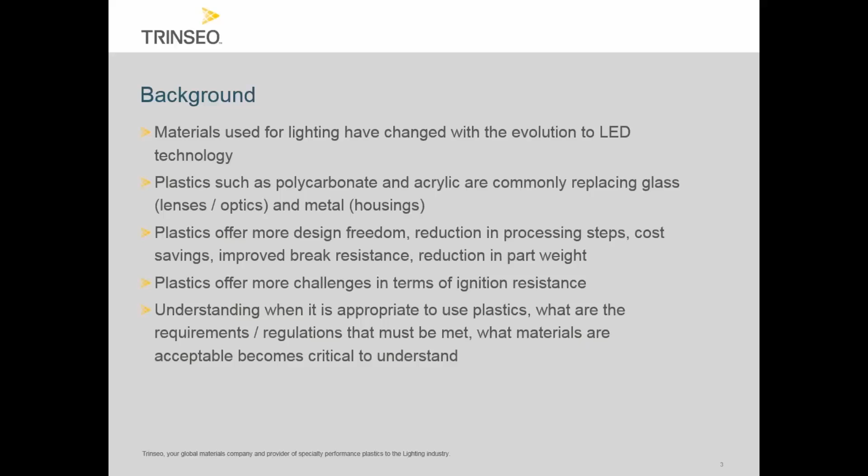And to help us understand the regulatory requirements for LED lighting applications and the process for achieving regulatory compliance, I'll now turn it over to John Allen, who's the president and founder of Product Safety Consulting. John, it's all yours. Thanks a lot, Bill, and welcome everybody to the webinar. I'm John Allen, as Paula and Bill indicated.

Been doing compliance for the better part of 31 years now. Lighting has always been part of our work. So we've seen the LEDs come, and all the new requirements, UL 8750 and 1598. So we're very well versed in lighting compliance, which allows us to partner with Trinseo on this webinar, and we're very happy to do that.

What we'd like to start with actually are a few polling questions. What really caused you to be interested in this webinar? So we get an understanding of why you're here and how we can help. As a designer, you're interested in regulatory issues or testing for polymers. You're interested in how regulations might impact your purchasing, or you're a manufacturer and you sell polymers and you want to understand some of the requirements for enclosures and polymers as it relates to lighting.

We see that compliance can many times be an issue, and as consultants we see designers and companies that don't read the standard ahead of time. You're going to end up with some non-compliances. 9 out of 10 products fail the first time through, and it really can screw up your timing on your product launches, get you back into a development or rework type process. Acceptance in the marketplace can certainly be hindered if you're late to deliver, and of course overall profitability could be hindered as well.

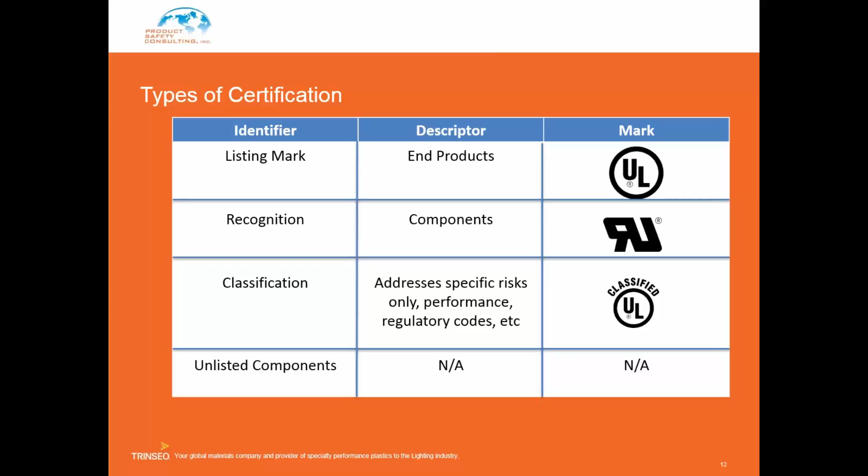Today, the international landscape, we're trying to get harmonized. Don't kill the messenger, but we're not there yet. Lighting, the main standard, 1598, is actually harmonized with IEC 60598, but the driver standard, the 8750, is not harmonized.

Harmonization, as I indicated, the lighting standards, not really harmonized at this point, even though 1598 and IEC 60598 are harmonized. 8750 and the IEC standard for drivers, 61347, are not harmonized at all. And back to 1598 and 60598, although they say they're quote-unquote harmonized, you still have national deviations within the IEC. So the U.S. actually has several national deviations affiliated with the IEC 60598.

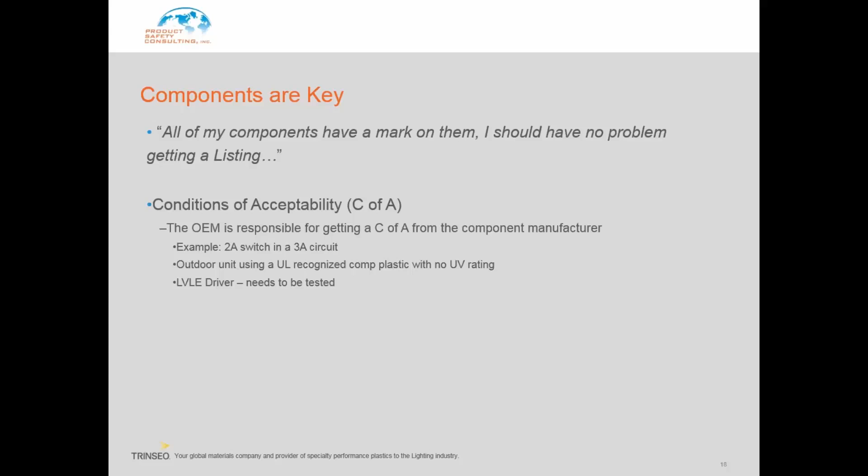Another C of A for outdoor units, for example, if you're using an enclosure material that doesn't have a UV rating or water immersion rating, then it's not going to be accepted even though the material itself is UL. Another condition, we'll go into a little bit more detail regarding low voltage limited energy drivers, but additional testing is required on that component.

The typical certification process, actually we use UL as an example, but pretty much any certification body is going to follow this process where we put together a request for quote, and the more detailed you are on your request for quote, the better. You have to indicate intended use, electrical ratings, properties, provide a sales brochure so they could see it as well. Get that into the certification body. UL, we do it online. CSA, we send to our contacts, salespeople. Then you get the quote.

And it's important to look at the quote and make sure that the quote matches what you asked for. Nobody's perfect, and sometimes a standard might have been incorrect or whatnot. So certainly review the quote and make sure it's appropriate for what you asked for. Then you accept it, and you'll submit all of your documentation that they requested, examples and samples. Then once the project is open at the certification body, they will do their construction evaluation first and then put the product into the lab for testing. We want to make sure that we're testing a product that complies with the construction requirements. It does not make sense to throw it into the lab before knowing that.

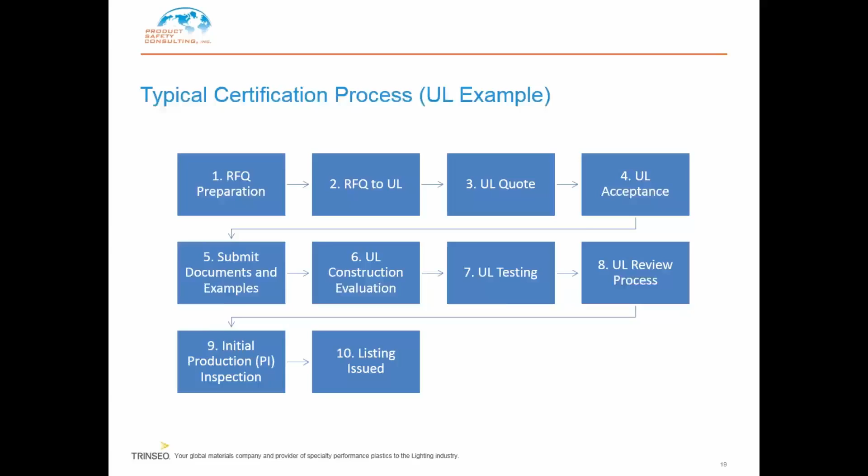A lot of people we see using solder as a connection, where solder alone cannot be used as a reliable connection. Parts have to be mechanically secured before soldering. The only instance where solder can be used as a reliable mechanical means of connection is in a Class 2 or LVLE circuit, and we'll be talking about that later in the presentation.

We see a lot of cabling without strain reliefs. If you have a cord-connected product, we're going to pull on that cord with 35 pounds for a minute, and we want to make sure we have no strain going to the connection inside the product.

Crossing low and high voltage conductors is unacceptable unless the low voltage conductor is rated for the line voltage that it's connected or in contact with. So your low voltage wiring going to your LED board, if it's in direct contact with one of the line voltage wires, that low voltage wiring has to be rated for 120 volts, or you physically separate it out. But that's a very common non-compliance that we see.

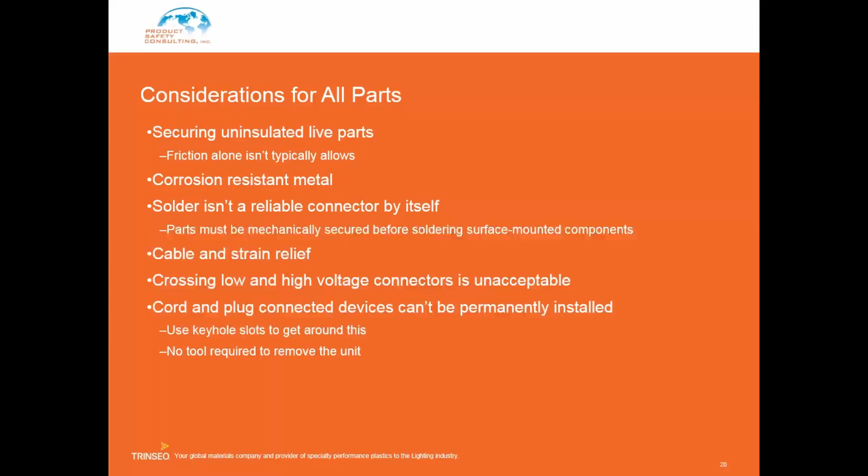We see cord and plug connected devices permanently mounted to a building structure. Well, that's not acceptable. If you're permanently mounted to a building structure, you cannot have a cord, per the NEC. However, you will see some corded devices mounted on a wall if they have keyhole slots. If I could remove the product from the wall without a tool, then it's actually portable and a cord is acceptable.

These are the different types of configurations we see for lighting. Some companies have a separate power supply, a separate driver, a separate array. Some put the power supply and driver together on one board with the array separate. Some have it flopped where it's the power supply, a Mean Well power supply, and then their own custom current limiting driver and array. And then, of course, we will also see all three on one board. So many different configurations we see with lighting.

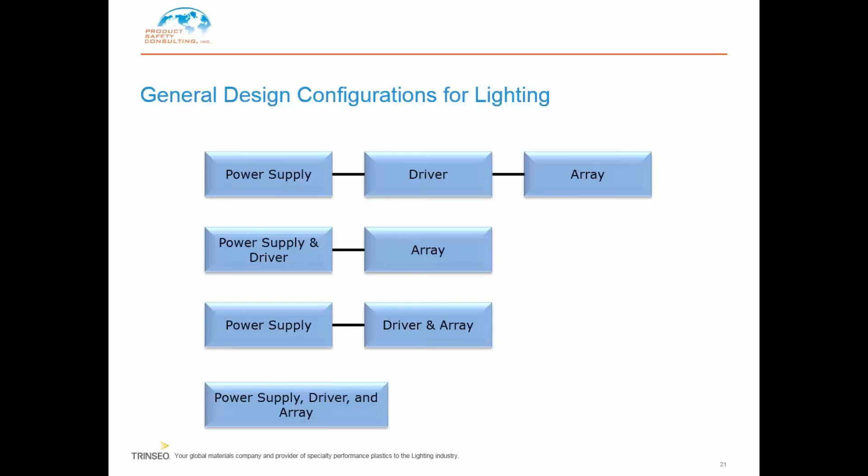There will be no need, however, per the requirements, for an electrical enclosure. So if you have a Class 2 power supply and your LED array is connected to that Class 2 power supply, there is no need for an enclosure over that LED array. The requirements: no mechanical testing, no temperature testing. We will do temperature testing on Class 2, and that's where the confusion with fire comes in. We say no risk of fire or shock, that's per the NEC, but we know LEDs get hot, so we will do temperature testing even on a Class 2 circuit.

However, they can be accessible. Wiring can be accessible. Less than 24 gauge wire can be used, reducing your cost. And then the lens over the LED, which is important, can now be a lower flame rating, 94 HB versus a V2, which is required for non-Class 2 circuits.

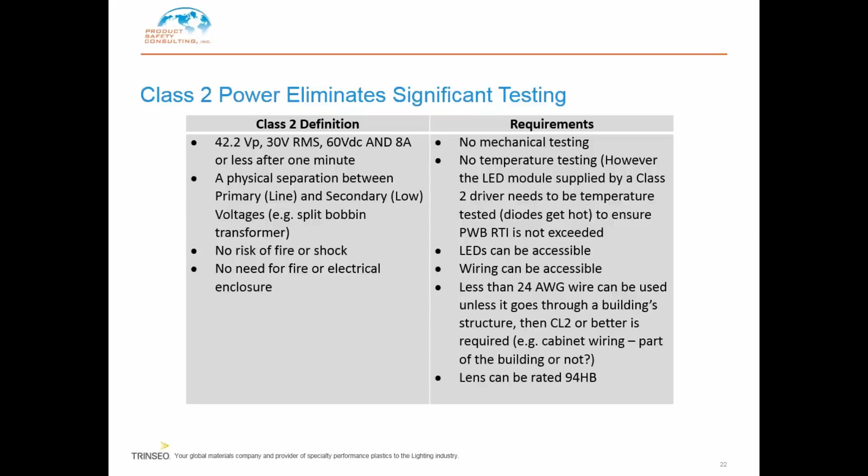If you don't have a Class 2 circuit, we can evaluate your circuit to be considered low voltage limited energy. The voltage and current limits are the same, so basically what we do is go through your circuit and find the point within the circuit that meets those voltage and current limits. Then you go one more step, and that part of the circuit from there on is considered low voltage limited energy. We will do component breakdown ahead of that to make sure that under single fault condition you still meet the voltage and current ratings to be considered LVLE.

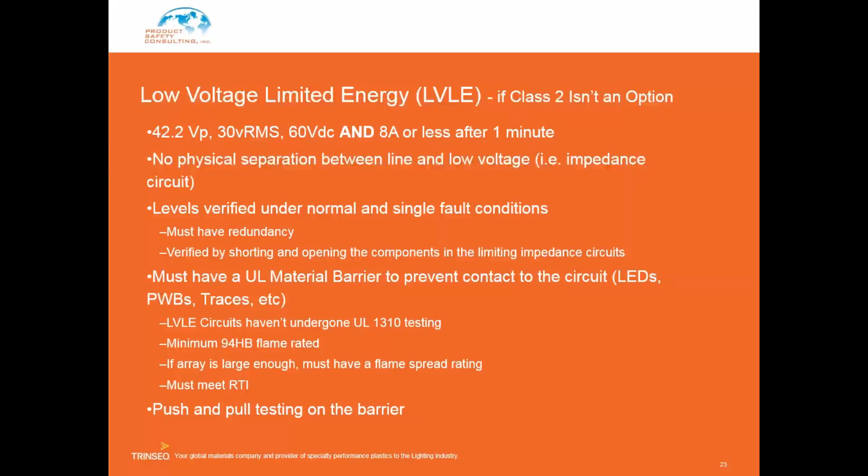But again, your advantages are your enclosure over the LVLE circuit can be a lower flame rating. However, you still do need a barrier. So if you have an LVLE circuit, you still need some kind of enclosure. And there will be a push and pull test on that barrier, or enclosure as we call it.

If you're not Class 2 or LVLE, your enclosure, even over your LED, if it's not considered Class 2 or LVLE, your enclosure over the LED array, of course, has got to be a UL material. It has to be 94V2 now for portable, or 5V for permanently mounted equipment versus that 94HB. Big cost difference, and I'm guessing a big difference in the ability to let the light out.

We still have to comply with the relative temperature index ratings. That's why we do temperature testing. There's going to be much more mechanical abuse testing on enclosures of non-Class 2 circuits. And if you're outdoor, you still have to have the UV rating and water immersion rating.

The circuit itself, if it's not Class 2, every electrical component in there is going to be called out in your report. We will need voltage mapping so we can evaluate the creepage and clearances on the circuit boards from trace to trace. And we will also be breaking down components, shorting resistors, opening capacitors. There's just a lot more engineering evaluation to do. Doesn't mean it can't be done, but life gets a lot easier if you're Class 2.

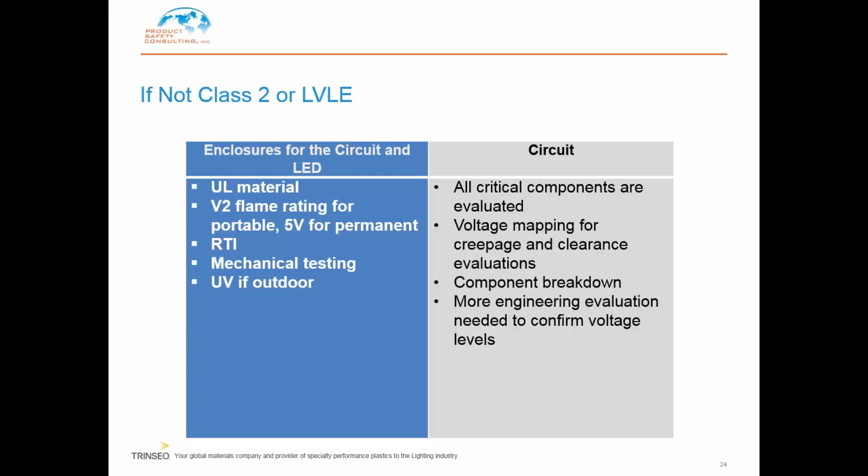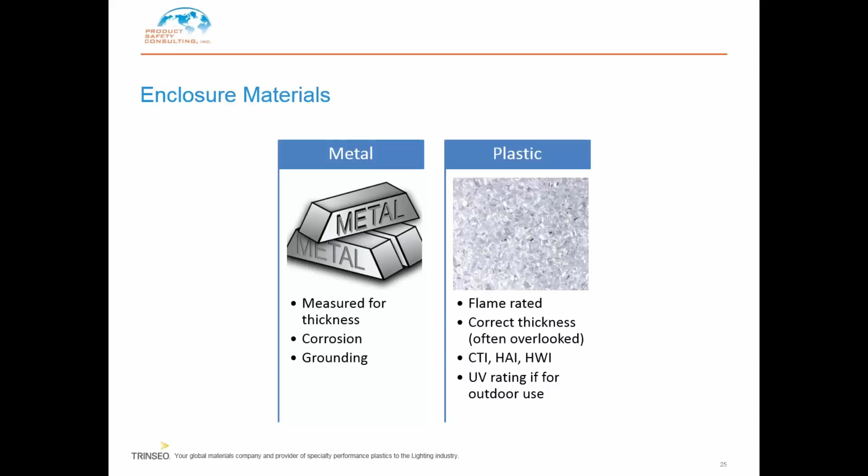Enclosure materials for lighting. Of course, we see metal and plastic, and for metal, you usually have to have a certain thickness depending on the luminaire. You will need corrosion protection, and of course, the product will have to be grounded. For plastic, you're going to need flame rating, appropriate flame rating. The correct thickness we'll talk about in a minute. We'll show one of Trinseo's yellow cards. If it's in direct contact with live parts, you're going to need some electrical properties, CTI, HAI, HWI, and of course, if it's outdoor, UV rating.

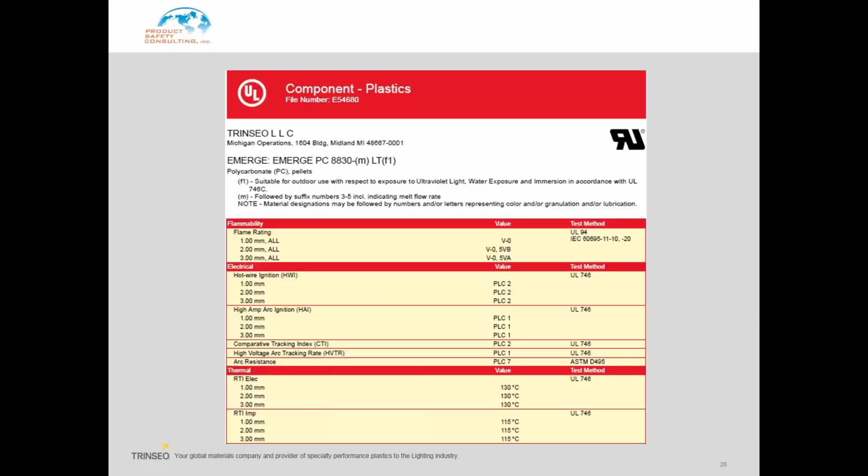The thermal indexes, you can see RTI electrical and then RTI impact, IMP. They are lower. So under our normal operation testing, if this was an enclosure, we'd have many thermocouples on the inside wall of the plastic trying to find the hottest spot, and they would all have to be under 115 degrees C for it to be accepted as a UL or NRTL certified product.

More on, of course, polymeric enclosures. If it contains live parts, it's considered an enclosure. And we have to pass temperature testing. There's mechanical abuse testing as well, drop, ball impact, and crush. You have to be conscious of openings. There's a finger probe in the standard you may or may not be familiar with, but it's an articulating probe that we put in the openings to see if we can touch live parts. That cannot happen. So if you have a big opening, you put a barrier or you insulate it, or you have to make the opening smaller and then use more of them.

If you're outdoor, of course, you have to be UV rated, and you must pass the water exposure, and cold impact testing is required for outdoor products. And as I indicated, if you have uninsulated live parts within a 32nd of an inch, doesn't have to be in contact with, but if you're within a 32nd of an inch of a plastic material, that plastic material must have electrical properties.

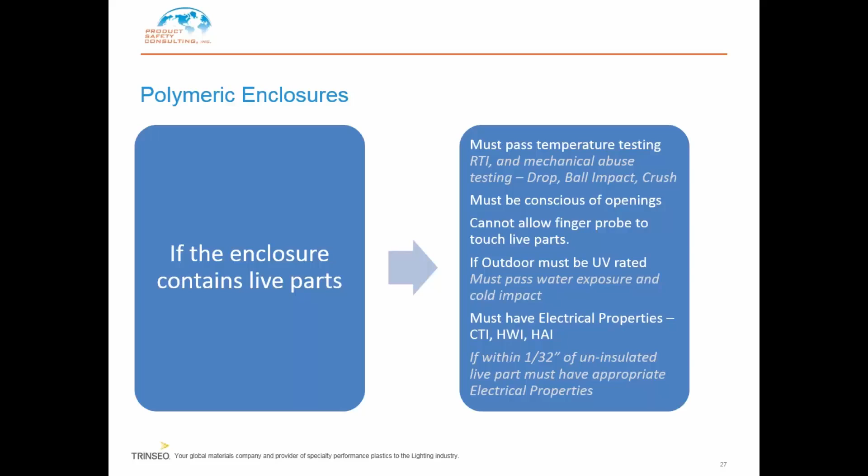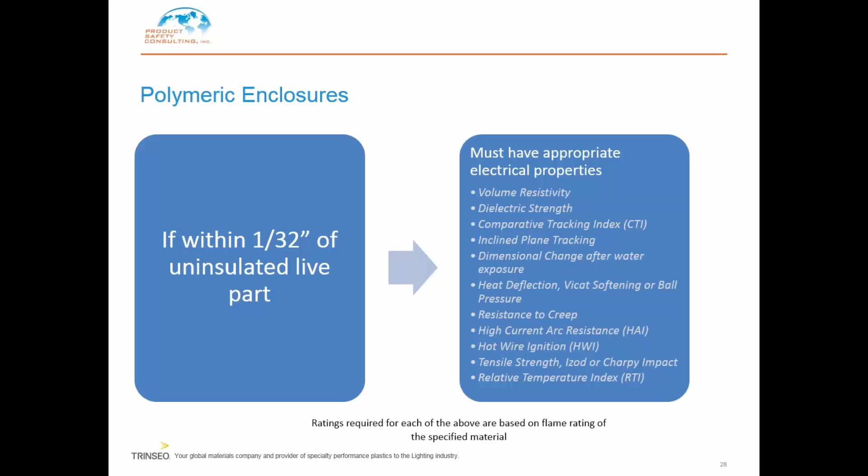These are the electrical properties if you do need them: volume resistivity, dielectric strength, CTI, inclined plane, dimensional change after water exposure, heat deflection, Vicat softening, or ball pressure test is done. Resistance to creep, high current arc resistance, hot wire ignition, tensile strength, and of course relative temperature index.

If you're outdoor, you also of course need to do some kind of water exposure on your luminaire. The material itself has to be UV rated and immersion, but you will be doing rain test or splash testing depending on the location of where your luminaire is outdoor.

If it's a decorative part, you can get away with an HB flame rating. What does decorative mean? Decorative means that it's not enclosing any live parts. So if you have a part that's hanging off the end and it's not enclosing any live parts, it can be an HB flame rated material.

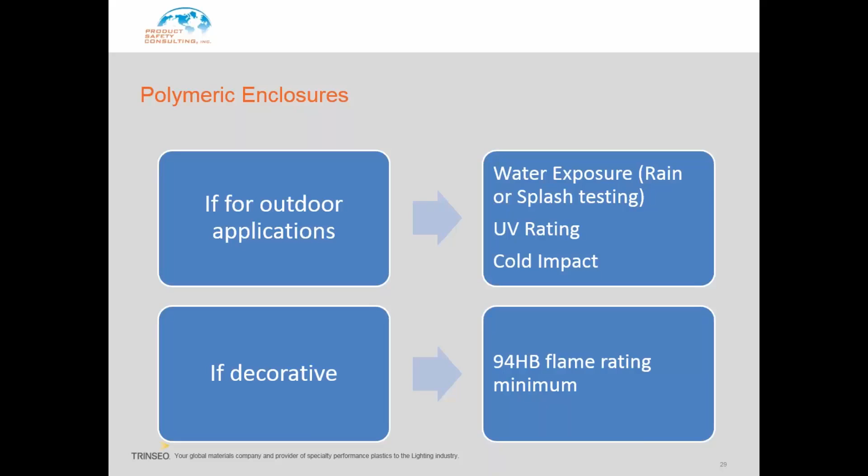Table lamps, if you comply with the construction requirements of a table lamp, i.e. your incandescent bulb that we don't sell anymore is a certain distance from the shade, that's a test exempt product as well. So make sure when you're reading UL 1598, if you want to be considered test exempt, there's a whole section that describes how to do that.

We're always going to be doing dielectric testing. That confirms if there's any insulation system nicks in wires, sharp edges, whatnot, that are going to short to ground. Some kind of abnormal is going to be done. Output loading. If you have a motor or a fan in there, we're going to block the fan. Thermostats, we're probably going to short them. And hopefully you have a thermal limiting device there.

For cord-connected devices, leakage current is always required. We want to make sure that the current leaking from the appliance to ground is under certain shock limits, 0.5 milliamps. Cord-connected devices, as I indicated, we're always going to do a strain relief. CSA up in Canada requires a push back. So do the IEC standards.

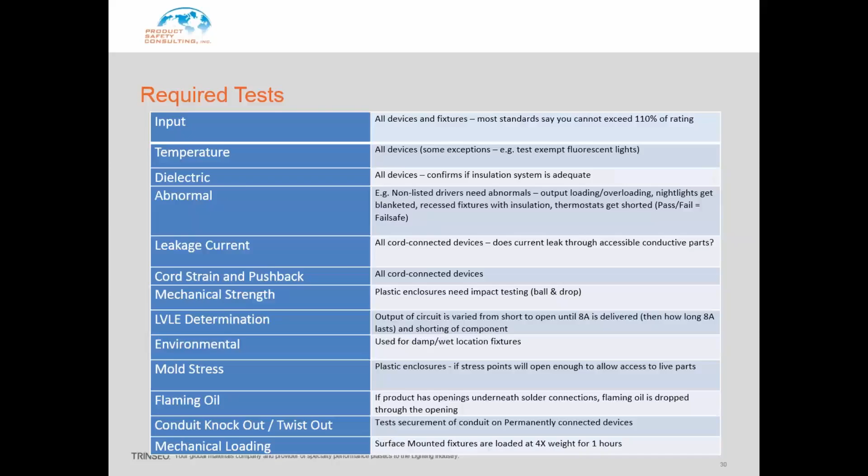Key points for our webinar today: always be certain the product will pass before you submit. Read the standard clause by clause. If you have questions, call somebody. UL, Intertek, they're pretty good about answering things. Of course, we are as well. Make sure all your components are recognized and appropriately suited to the end product. Don't use that UL recognized 2-amp switch in a 3-amp circuit.

Make sure when you're talking to your suppliers for your critical components that you get those conditions of acceptability. They should have no problem giving those to you. It's not proprietary information. It's useful information for the designer to pick the right component. We actually do a webinar just on components, choosing them as well. So it's a critical thing.

Class 2 and LVLE makes life a lot easier. If you can get a Class 2 power supply, I would recommend it. Everything on the output of that, from a risk of shock and fire standpoint, is sort of mundane from a compliance standpoint. Anticipate the test program, do the testing ahead of time, and of course build in extra time. If the certification agency tells you 4 weeks, plan on 6. Those are some key points to remember.